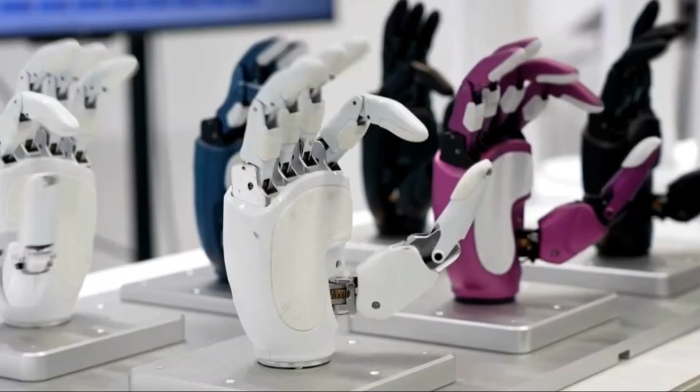A robotic hand in Beijing just lifted 50 kilograms while weighing 370 grams. That is 135 times its own body weight, lifted by a hand small enough to fit inside a winter glove. For comparison, if a 200-pound man lifted that same ratio, he would be curling a small car over his head with one arm. Engineers who study robotic grippers for a living called the number almost unbelievable when it first showed up in a product spec sheet.

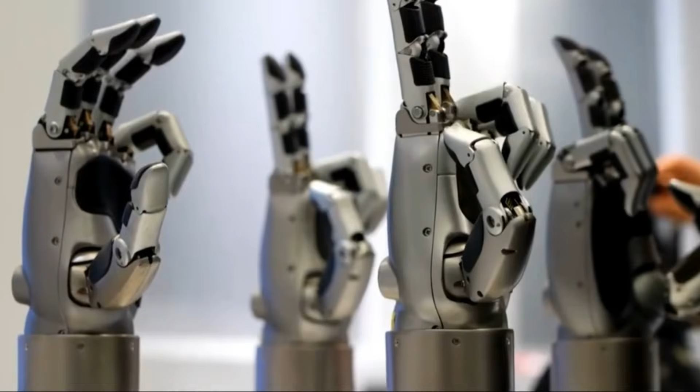And the company behind it is not a secretive military lab. It is a 2-year-old startup that is now being valued at $6 billion, built by a founder who says the whole idea started with a cartoon he watched as a kid. Today we are breaking down exactly how a machine this small got this strong, why the rest of the robotics industry has been stuck on this exact problem for years, and what it means now that China appears to have quietly solved it.

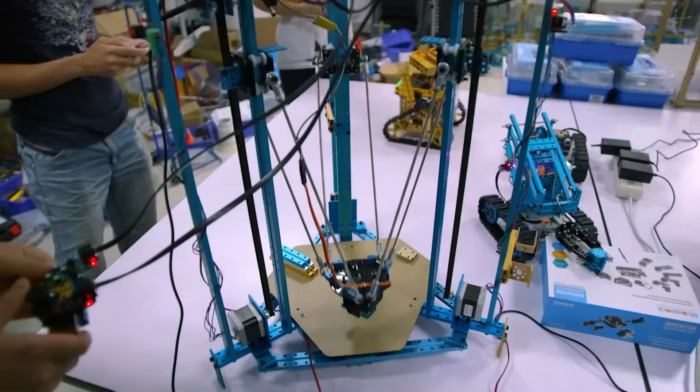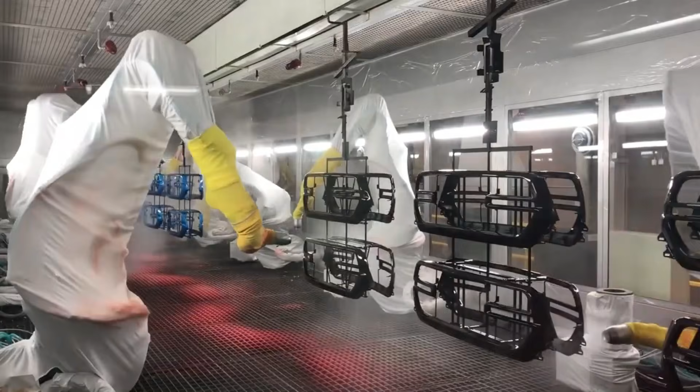For decades, the rule in robotics was simple and unforgiving. If you wanted a robot that could lift something heavy, you built it heavy. Industrial robot arms on car factory floors can lift over 1,000 kilograms, but they weigh as much as a small truck to do it. Their strength comes from thick steel frames, oversized motors, and gearboxes the size of a beer keg. That trade-off worked fine when robots lived inside a fenced-off cage on a factory floor, bolted to the concrete, never expected to move or to work anywhere near a human being. Nobody cared how much the arm weighed as long as it never had to leave its station.

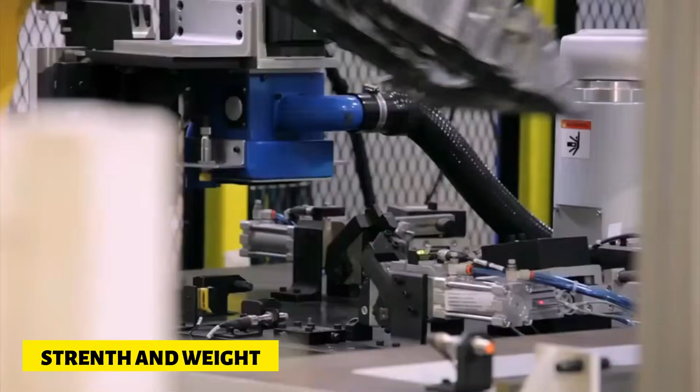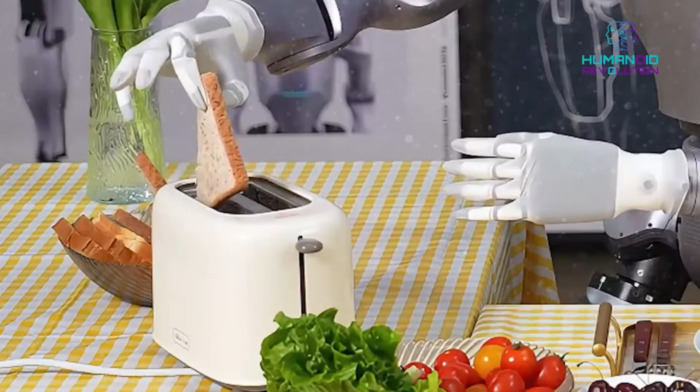For years, the entire industry built around one assumption: strength and weight move together. If you wanted 10 times the lifting power, you accepted 10 times the bulk, the cost, and the danger. Researchers did try to sidestep this problem years before humanoid robots became a mainstream headline. Back in the 2010s, labs at places like Harvard and MIT experimented with soft robotic grippers, origami-inspired designs made from fabric and rubber that could gently wrap around an object and lift up to around 1,000 times their own weight. It was a clever trick, and it proved the ratio itself was not impossible.

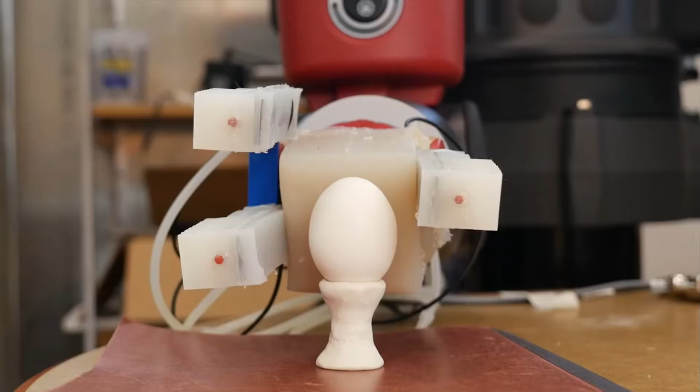But those soft grippers traded away almost all precision to get there. They were brilliant at gently scooping up a single round object, like a ball or a piece of fruit, and nearly useless at anything that required actual fingers, like turning a screw, pressing a button, or picking a single sheet of paper out of a stack.

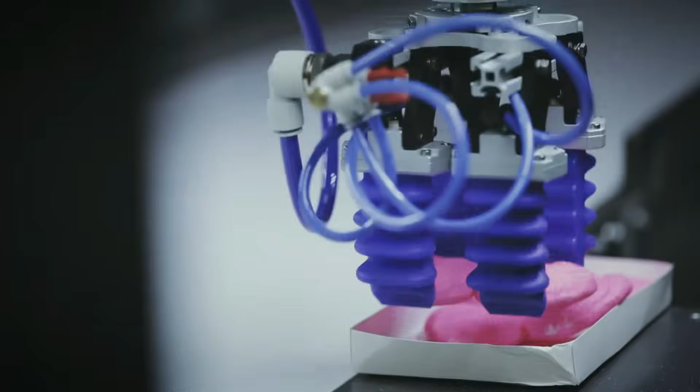Chinese labs ran their own versions of this experiment too. Researchers at the University of Science and Technology of China built magnetic soft grippers gentle enough to lift a dandelion puff without damaging a single seed, and separately built pneumatic muscle-driven grippers that could hoist over 35 kilograms using a winding, snake-like grip inspired by how an elephant wraps its trunk around a branch. Every one of these was proof that huge lifting ratios were achievable. None of them were proof that you could combine that strength with the fine control of an actual hand.

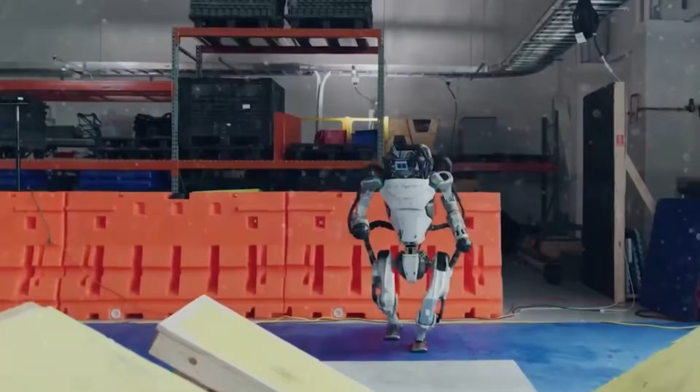Then, humanoid robots showed up, and that old rule turned into a wall. A humanoid robot does not get to bolt its hand to the floor. It has to carry that hand at the end of an arm, which is carried by a torso, which is carried by 2 legs trying to balance on uneven ground. Every extra gram in the hand becomes a problem for the shoulder motor holding the arm up and for the leg motors keeping the whole thing from tipping over.

Engineers ran into a brutal catch: make the hand strong enough to be useful in a warehouse or a factory, and it gets too heavy and too slow to move like a human hand. Make it light and fast, and it can barely grip a coffee cup, let alone a toolbox. Give it the gentle wrap of a soft gripper, and it can lift almost anything round, but hand it a screwdriver, and it is completely lost.

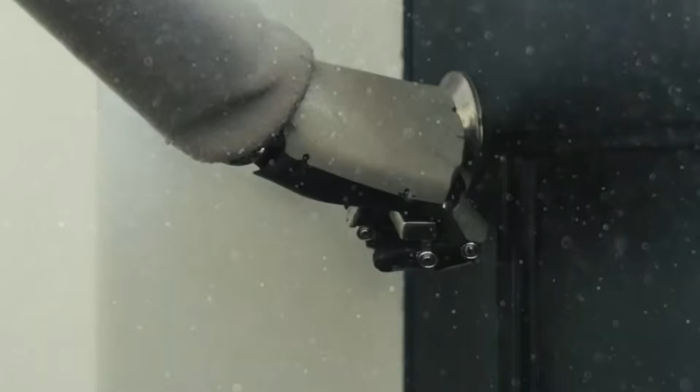For years, this was treated as close to a law of physics. You could have power, or you could have grace, or you could have precision. Picking 2 out of 3 was considered a good result. Getting all 3 into a single hand small enough to belong on a human-sized robot was the part nobody had actually pulled off.

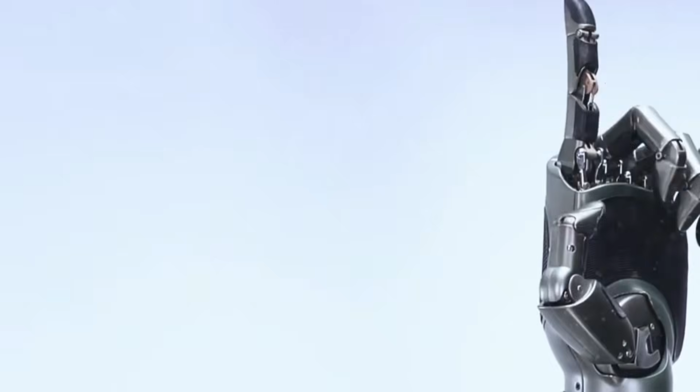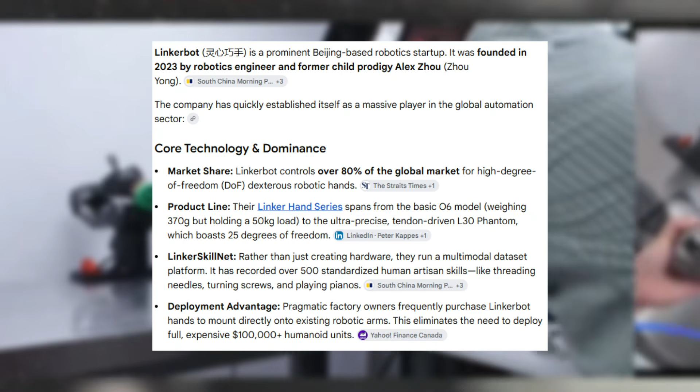The company that pulled this off is called Linkerbot, founded in Beijing in 2023 by a robotics engineer named Alex Zhou. Zhou has told reporters the spark for the whole company came from Doraemon, the Japanese cartoon about a robotic cat with a magic pocket that produces any gadget its owner needs.

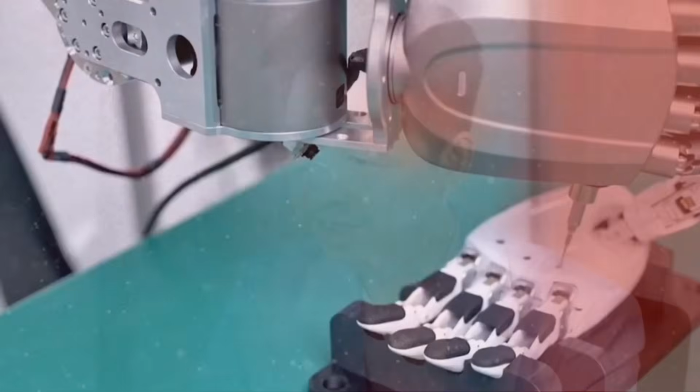As a kid, Zhou assumed the pocket was the trick. As an adult with a robotics degree, he realized he had it backwards. The pocket does not matter if you do not have hands capable of using what comes out of it. A robot with an infinite toolbox and clumsy fingers is still useless. The real magic, he decided, was never the gadgets. It was always the hand. That single realization became the entire foundation of the company.

So how do you build a hand that weighs about as much as a smartphone but can hold up a small motorcycle? The answer is not one single breakthrough. It is a stack of smaller engineering decisions that each shave weight or add strength layered on top of each other until the ratio flips in your favor.

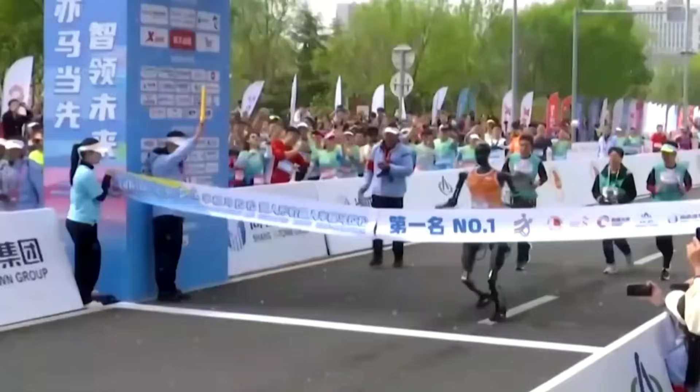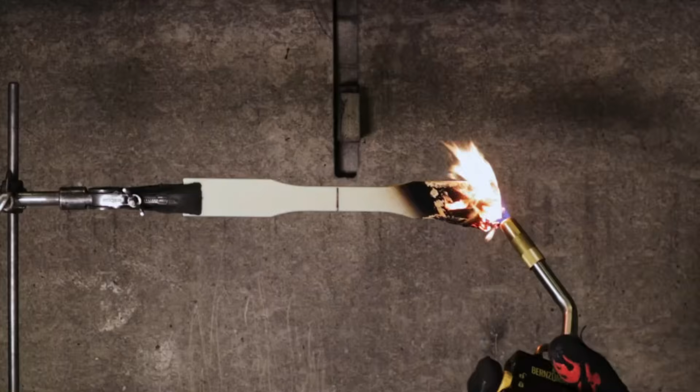Start with the materials. Most industrial grippers are built from metal because metal is strong and predictable under load. But metal is also heavy, and every gram in a finger has to be dragged around by everything upstream of it. Linkerbot's engineers switched large sections of the hand to a specialized engineering polymer called PEEK, a plastic that aerospace and medical device makers already trust because it holds its shape under heavy repeated stress without cracking, and it does this while weighing a fraction of what steel weighs.

Think of it like the difference between a bridge built entirely from solid iron beams and a modern bridge built from high-strength composite cable. The composite version can hold just as much weight, sometimes more, while using a small percentage of the material. That is the same logic packed into a hand small enough to close around a pen.

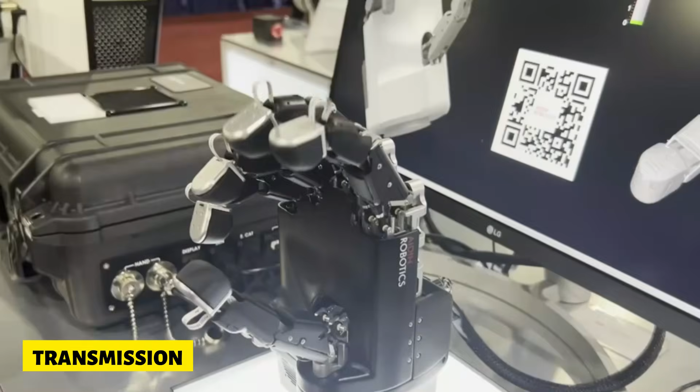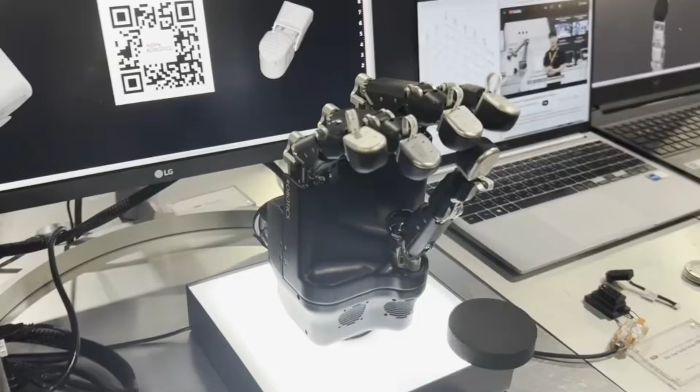Next comes the transmission, which is the mechanical link between the motor and the finger that actually moves. This is where most lightweight robotic hands quietly fail. A tiny light motor simply does not produce enough raw force on its own to lift 50 kilograms. So Linkerbot leaned on something engineers have used for over a century to solve exactly this problem: gear reduction.

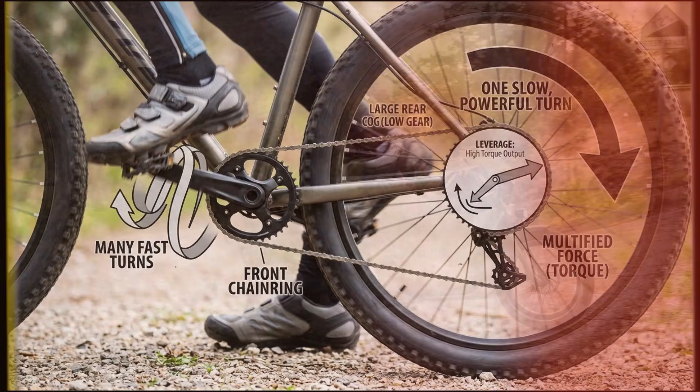Picture a bicycle. In its lowest gear, you can pedal a heavy cargo bike up a steep hill using barely any leg strength because the gearing trades your speed for your force. You spin the pedals many times to turn the wheel once, but each turn of the wheel carries far more force than your legs alone could apply directly.

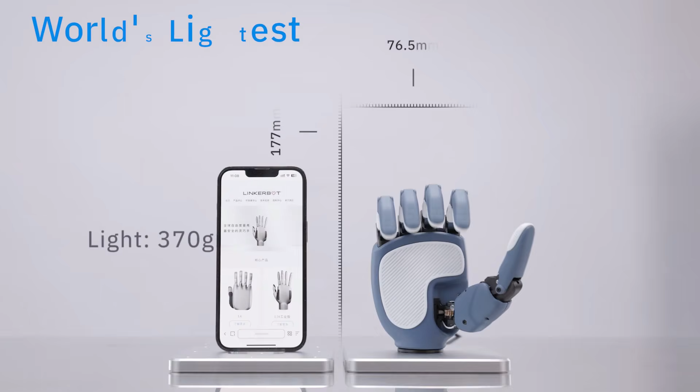Linkerbot's O6 hand uses a worm gear transmission built around in-house designed micro-reducers, engineered specifically to be small enough to fit inside a finger joint while still multiplying the motor's output by a huge factor. The company builds these reducers itself rather than buying generic parts off the shelf, which is part of why the finished hand can be tuned so precisely for this exact strength to weight target.

Here is the number that actually deserves its own moment. The finished O6 hand weighs 370 grams, roughly the weight of a full can of soda. It is rated to handle a 50-kilogram load, more than the weight of most adult humans. That works out to being 135 times its own weight, a ratio the company's own engineers have described in interviews as a genuine engineering milestone, not just a marketing number.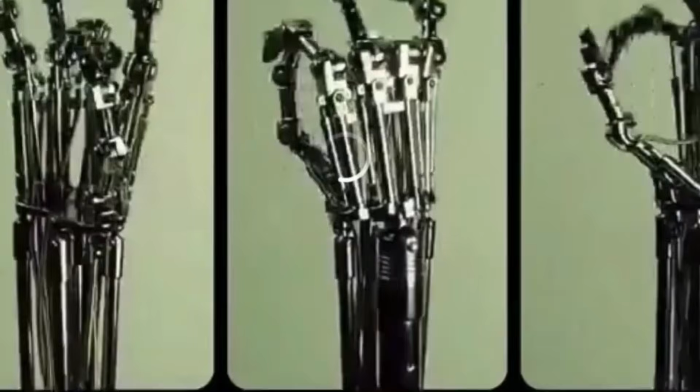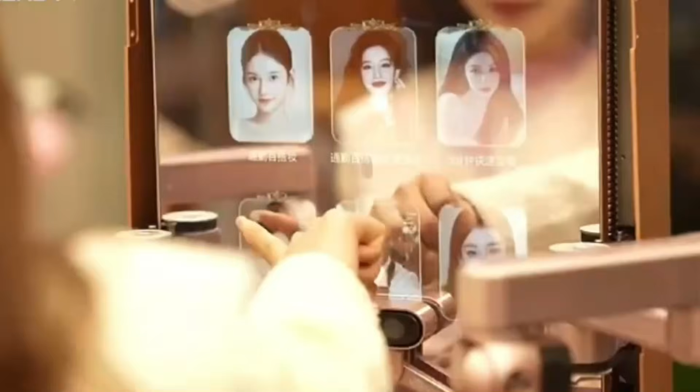And this is not a one-off lab demo built to impress a camera crew once and then quietly retired. Reuters reported that Linkerbot is already manufacturing close to 5,000 of these hands every single month, with plans to scale that up to 10,000 units monthly in the near future. This thing is not a prototype sitting in a glass case. It is shipping.

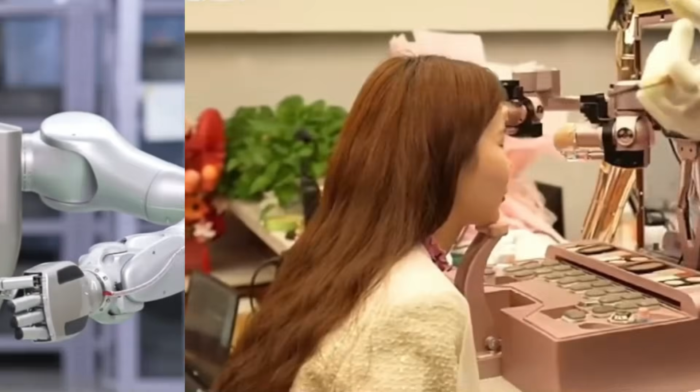The hand also is not a one-trick strongman. The same design that lets it lift 50 kilograms also lets it perform tasks that require the opposite of raw strength. Company demonstrations show the hand threading a needle, a task that demands positioning accuracy down to roughly 0.2 of a millimeter, tighter than the width of a human hair times 2.

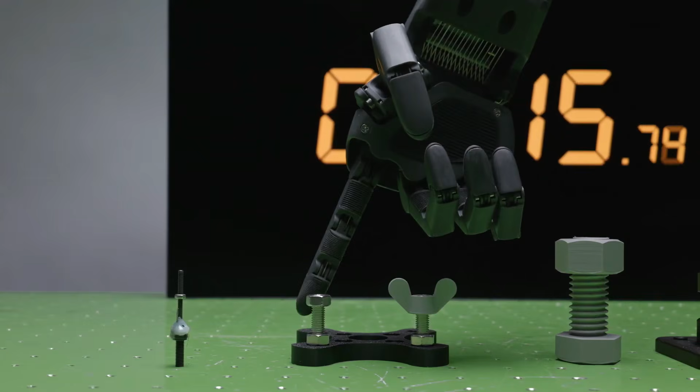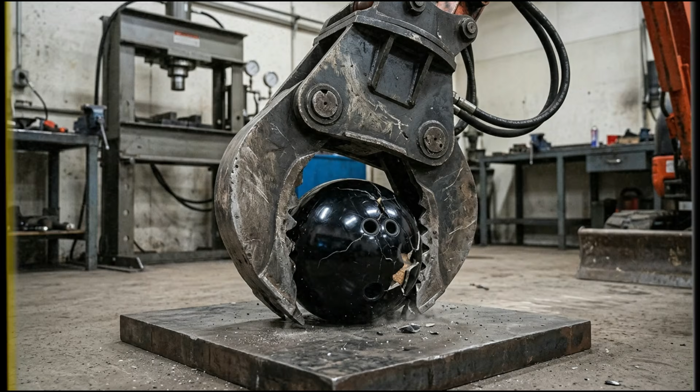It can grip something as delicate as a soft, deformable object without crushing it, and in other demonstrations it has been shown rapidly turning screws with the kind of speed and precision you would expect from an assembly line worker who has done the same motion 10,000 times. That is the part that makes this genuinely different from a simple hydraulic claw. A hydraulic claw can crush a bowling ball. It cannot pick up an egg without breaking it.

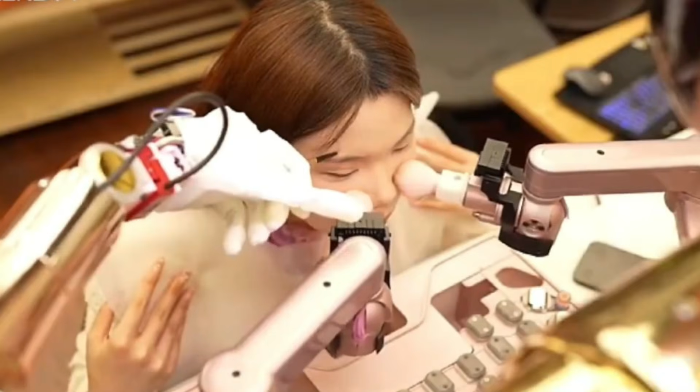Linkerbot's hand is being asked to do both in the same fingers, switching between them in seconds. The O6 is actually the entry-level model in a much wider lineup, and this is where the strategy becomes clearer.

The full Linker hand family spans anywhere from 6 degrees of freedom on the O6 up to 42 degrees of freedom on the most advanced research-grade versions. Degrees of freedom being the engineering term for how many independent ways a joint can move, which is essentially the measure of how close a robotic hand gets to matching the flexibility of a human one.

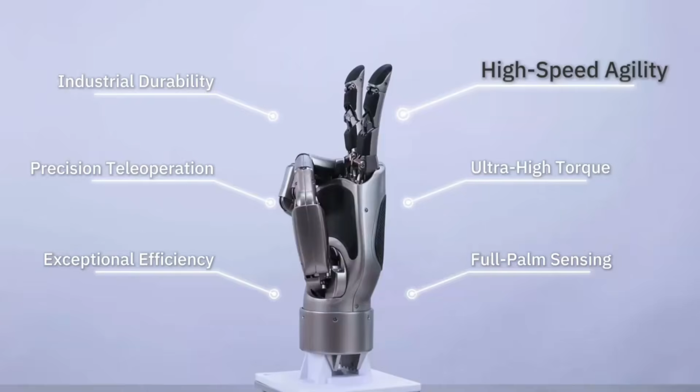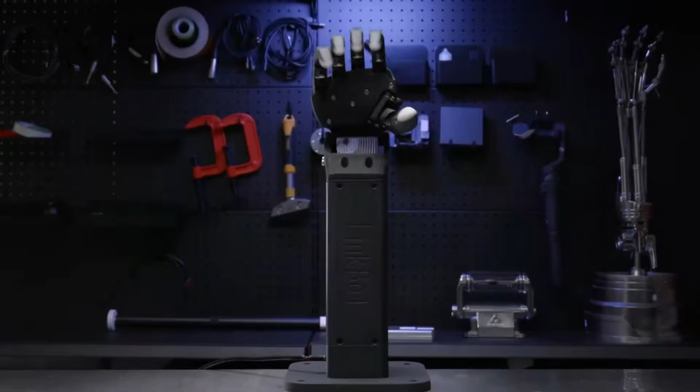At the industrial end sits the L20, built around what the company calls a super electric cylinder, a compact linear actuator rated for around 200 newtons of thrust at 90% drive efficiency, tested to survive more than 1 million movement cycles before wearing out. At the research end sits the L30, tuned less for brute strength and more for the kind of repeatable, needle-threading precision that university robotics labs and high-end manufacturers are willing to pay a premium for.

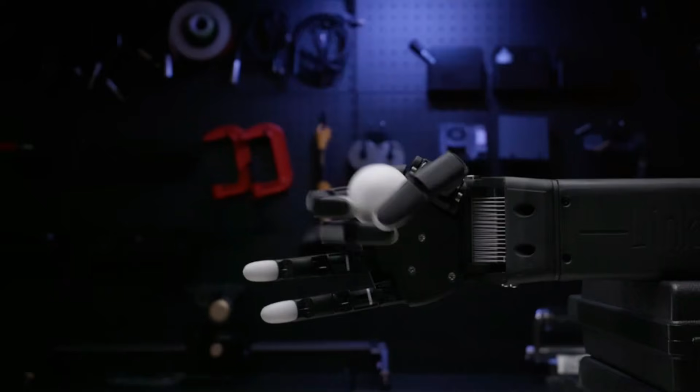Instead of building one hand and hoping it fits every customer, Linkerbot effectively built an entire menu, letting a warehouse buy raw lifting power while a university lab buys fine motor control, all sharing the same underlying manufacturing platform. That platform is also where the real strategic weight of this story sits.

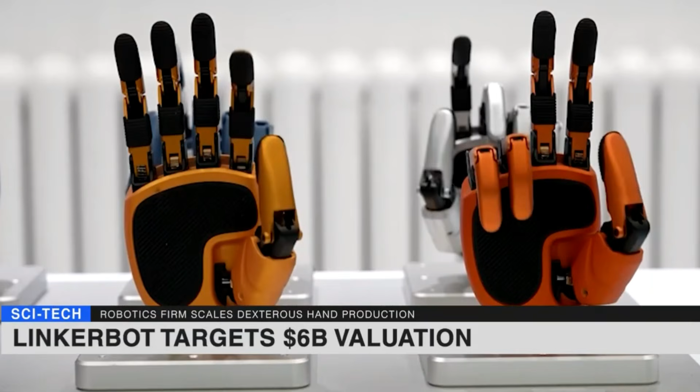Behind every one of these hands is something called Linker which the company describes as the largest real-world dataset of dexterous manipulation skills currently in operation, built from more than 500 distinct captured behaviors, everything from twisting a bottle cap to folding fabric. Every hand shipped out into a factory or a lab is quietly feeding data back into that system, and every improvement to the underlying skill set can, in theory, be pushed back out to every hand already in the field through software rather than a hardware redesign.

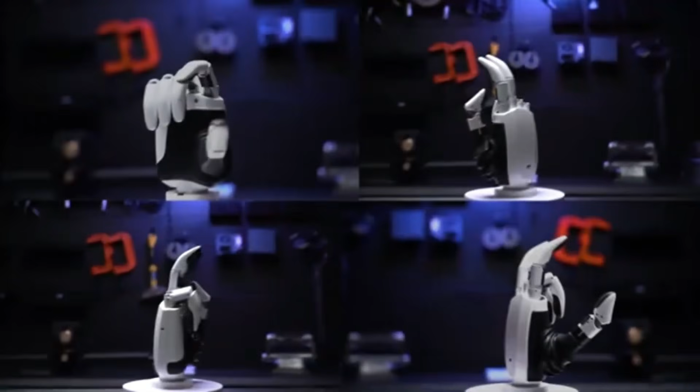And in a detail that sounds almost like science fiction until you realize it is already running in production, some of Linkerbot's factories in Beijing and Shenzhen are now using dexterous hands to manufacture other dexterous hands, robotic hands performing the delicate assembly work needed to build the next batch of robotic hands. That is not a research paper claim about what might be possible someday. According to the company, it is a working production line today.

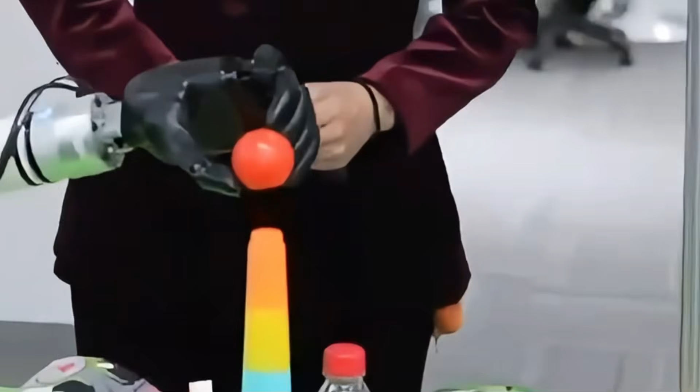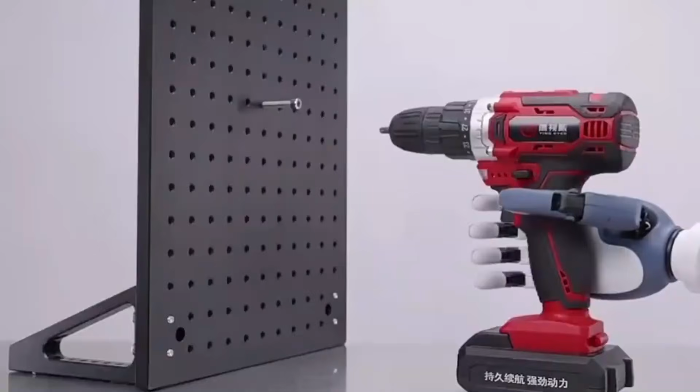Now here is the part that a lot of the breathless headlines around this story tend to skip entirely. 50 kilograms is the rated maximum load under specific controlled conditions, not the number the hand is casually lifting all day in a warehouse. Engineers who work with robotic grippers point out that a headline strength figure like this usually describes a best-case scenario, often a straight, symmetrical grip on a rigid object positioned exactly where the fingers can apply maximum leverage.

Ask that same hand to grip an oddly shaped, off-balance load at an awkward angle, the kind of thing a human warehouse worker deals with constantly without thinking twice, and the safe working load drops well below that headline number. This is true of essentially every strength claim in robotics, from industrial arms to humanoid grippers, and it is not unique to Linkerbot. It is simply the gap between a spec sheet and the messy real world that spec sheets aren't tested in.

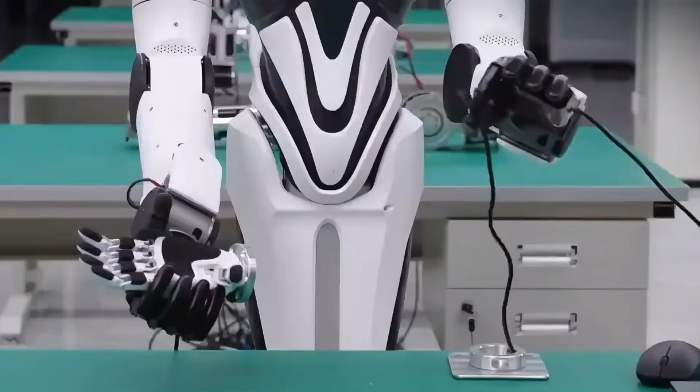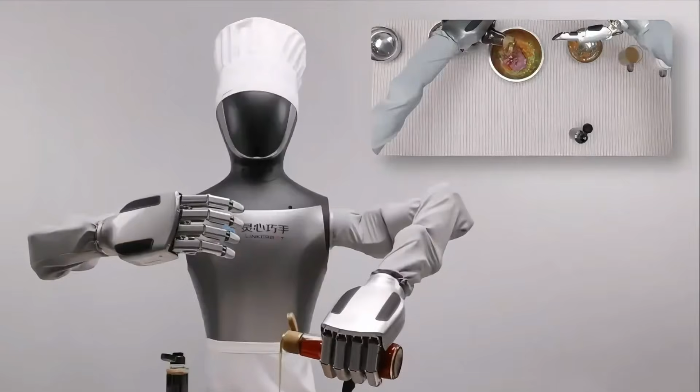There is a second honest catch worth naming here. A hand this light achieves its strength partly by using specialized polymers and micro-engineered gear systems instead of thick, forgiving steel. Lighter, more precisely tuned components generally have a narrower safety margin before something wears out or fails, which is exactly why Linkerbot emphasizes that its polymers are self-lubricating and corrosion-resistant. Engineering choices clearly aimed at extending the working life of a mechanism that has less structural material to fall back on if something goes wrong.

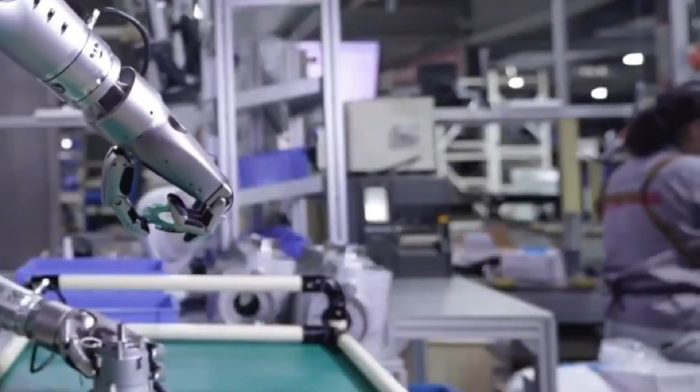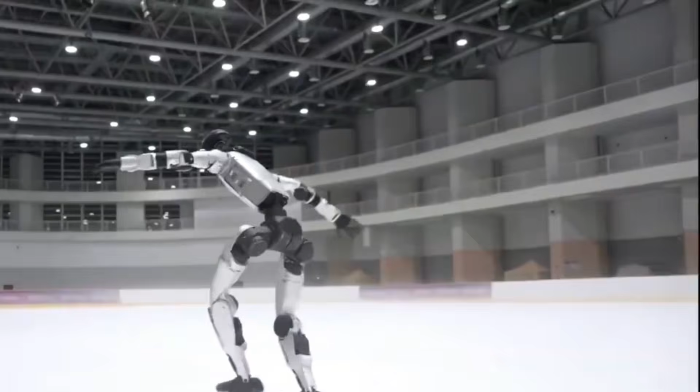Whether these hands hold up to years of continuous factory use, the way a bulky old-fashioned steel gripper does, is something that will only really be proven over time, not in a 2-minute demo video. It is also worth saying plainly that most of the performance numbers circulating about this hand come from the company itself, and from interviews its executives have given to journalists. So, as always, healthy skepticism toward company-reported figures makes sense until independent third-party testing catches up.

And Linkerbot is not competing in an empty field, which is worth remembering before crowning any single company the winner. Other Chinese firms are chasing the exact same strength-to-weight target from different angles. Wuji Hand, built by a rival startup, uses 20 separate joints packed into a 600-gram hand and claims it can lift around 20 kilograms while still performing delicate cutting tasks.

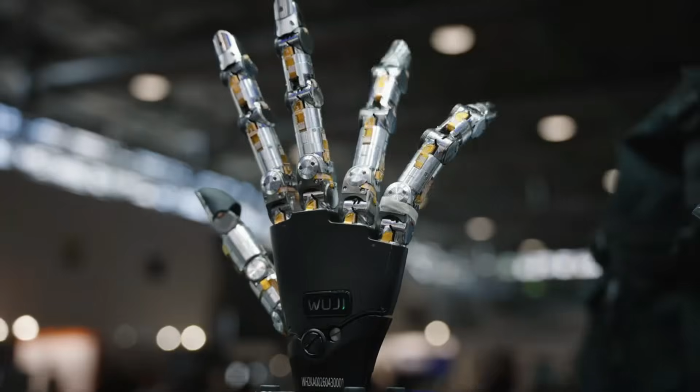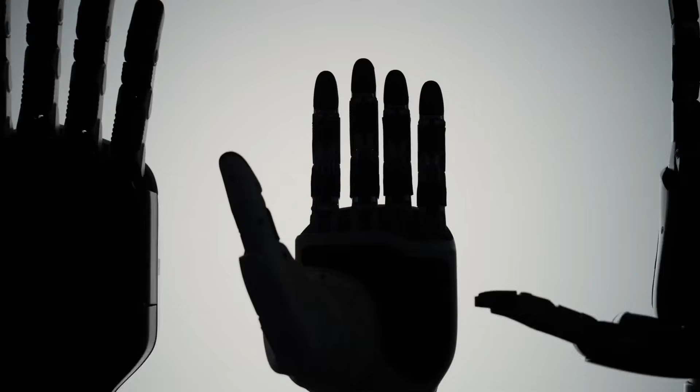Agibot, another major player in China's humanoid robotics scene, recently unveiled its own dexterous hand built around vision-based tactile sensors rather than raw lifting numbers, betting that sensing and touch feedback will matter more than headline strength once these hands are actually working around people.

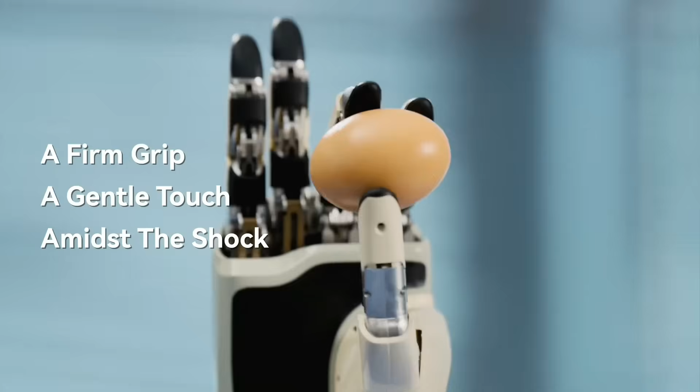None of these companies has fully cracked every part of the puzzle at once, but together, they show this is not one lucky engineering team stumbling onto a fluke. It is an entire national industry converging on the same hard problem from multiple directions at the same time, which historically tends to produce faster progress than any single company working alone.

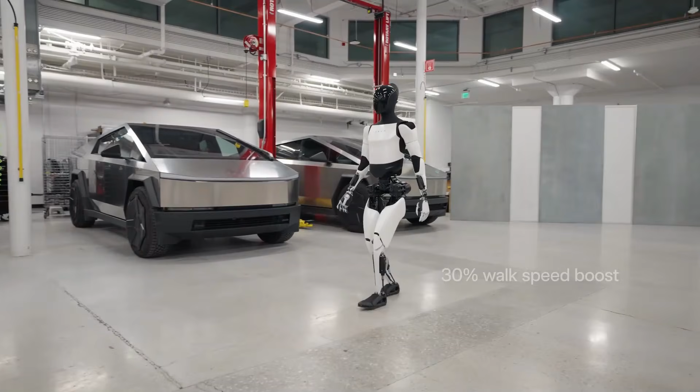Zoom out, and this is not really a story about one clever hand. It is a story about who controls the component that every humanoid robot on Earth is going to need. Tesla's Optimus, Figure's humanoid robots, and dozens of other American and European projects all need dexterous hands, and right now, most of them either build their own in relatively small numbers or shop for suppliers in a market where Linkerbot claims to already control more than 80% of global market share for high degree of freedom robotic hands. That is not a small statistic.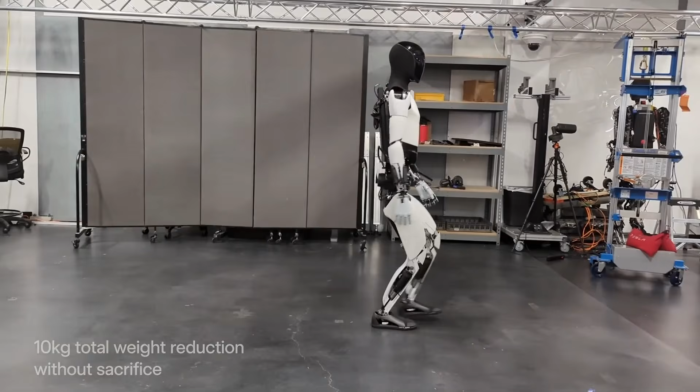If accurate, it means that when the next wave of humanoid robots rolls off assembly lines anywhere in the world, there is a real chance the part doing the actual gripping, the single most mechanically complex part of the entire robot, was designed and built in Beijing.

This fits a pattern that shows up again and again across China's advanced manufacturing push. Rather than trying to build the flashiest, most headline-grabbing finished product first, Chinese firms have repeatedly focused on cornering the unglamorous middle layer of a supply chain: the batteries, the rare earth processing, the specialized motors, the components everyone else needs but few companies actually want to spend years perfecting.

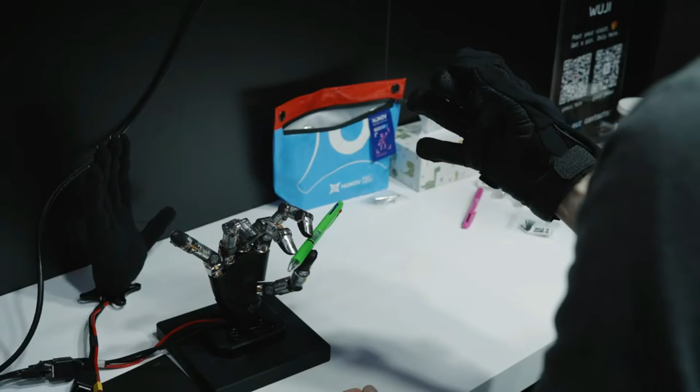Linkerbot's own backers include state-linked investment funds alongside private capital from firms like Alibaba's Ant Group, which suggests this is not viewed inside China as just another startup chasing a trend. It is being treated as strategic infrastructure for an entire coming industry.

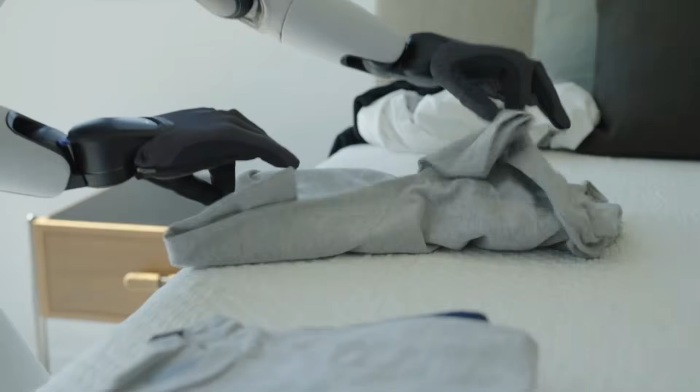Competing Chinese firms like Unitree, which recently filed for its own stock market listing seeking a valuation up to $7 billion, show this is not a single company's bet either. It is a full ecosystem racing forward at the same time, each company solving a different piece of the humanoid robot puzzle.

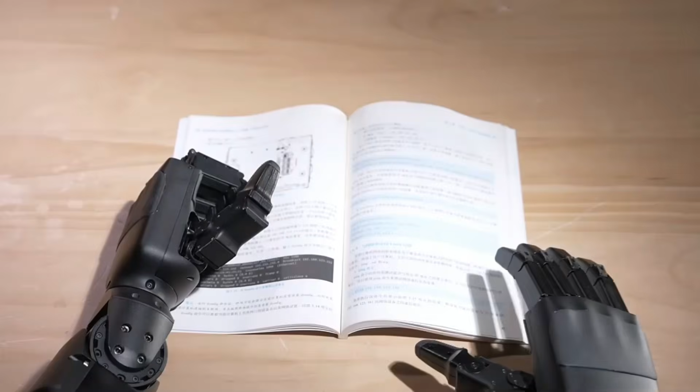Investor interest in the whole sector reportedly surged after Unitree's robots put on a widely watched televised demonstration, and after humanoid robots took part in a public half-marathon in Beijing. The kind of stunt that looks like a gimmick right up until it becomes the moment a whole industry gets taken seriously by investors who were previously on the sidelines.

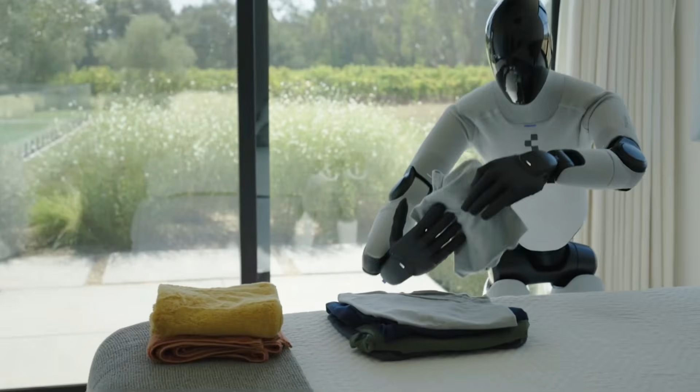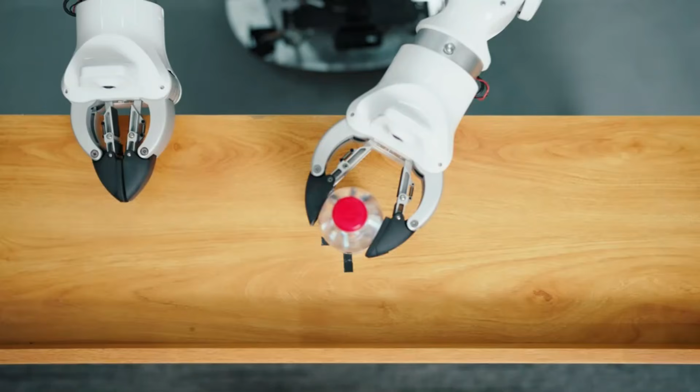Not every Chinese robotics company is even chasing the same goal. While Linkerbot leans hard into high-value precision work, skills like massage therapy or assembly line craftsmanship that command a premium over basic manual labor, other domestic competitors such as X-Square Robot are explicitly training their hands for a completely different market: ordinary household chores, laundry, dishes, tidying a kitchen counter.

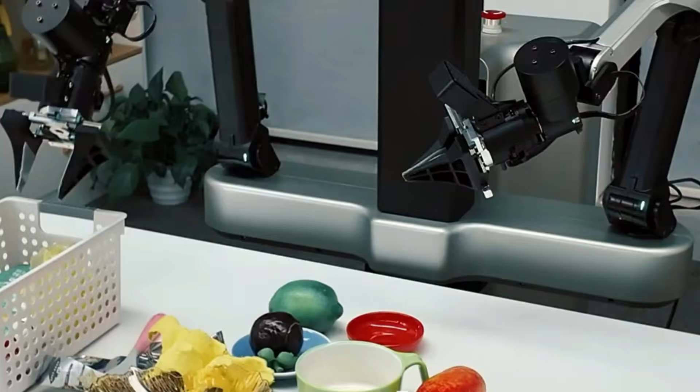That split matters, because it means China is not betting its entire robotics industry on one use case. It is simultaneously building toward the high-end industrial buyer and the ordinary consumer household, often with hands descended from the same underlying research into strength-to-weight ratios that started this whole story.

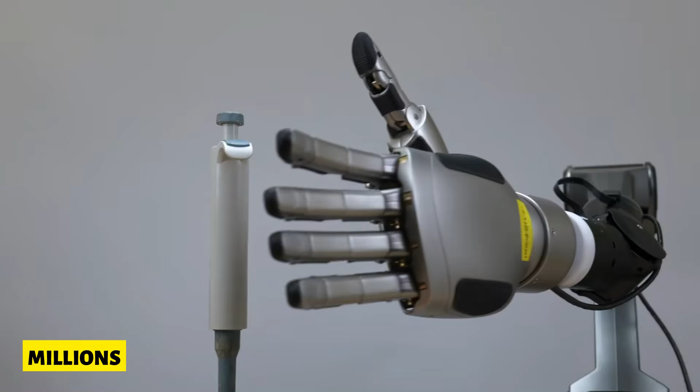The open question nobody can fully answer yet is what happens when hands like this one get bolted onto millions of humanoid robots working in homes, hospitals, and warehouses around the world. Does a genuinely dexterous, strong, lightweight robotic hand mean cheaper elder care and safer warehouse jobs, taking on the repetitive lifting that wrecks human backs and shoulders over a career?

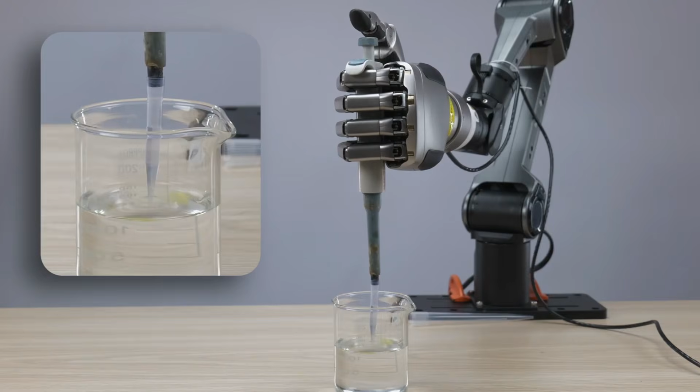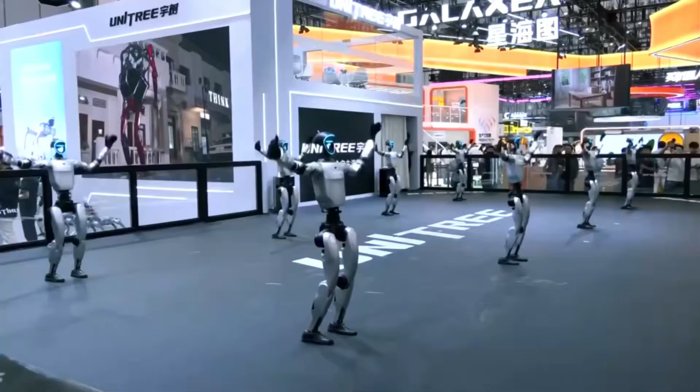Or does a component this capable, this cheap, and this dominant in global supply simply accelerate how fast physical labor gets automated, faster than most economies are prepared to handle? Joe himself has said publicly that he sees these hands eventually performing tasks like massage therapy or even assisting in dentistry, skills he describes as worth several times more than basic manual labor.

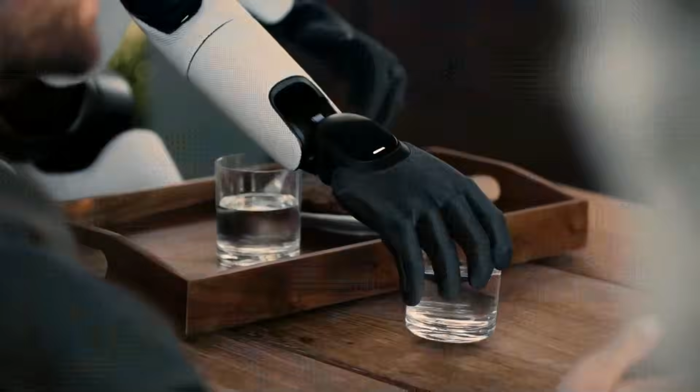That is either an exciting glimpse of what dexterous robotics can unlock for human well-being, or it is a preview of just how far up the skill ladder automation is now willing to climb. Maybe it genuinely depends on which industries adopt this technology first and how carefully the transition gets handled.

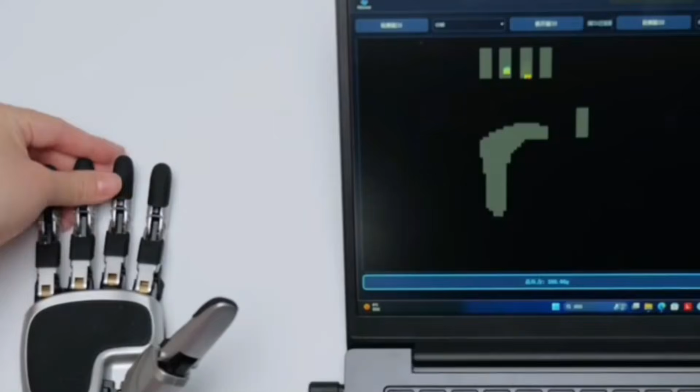Either way, the numbers on that spec sheet are real. They are shipping in the thousands every month, and the gap between what a robotic hand used to be able to do and what one now weighs while doing it has quietly closed faster than almost anyone in the industry predicted. What happens next probably depends less on the engineering, which increasingly looks solved, and more on how quickly the rest of the world decides to catch up, or decides it needs to at all.